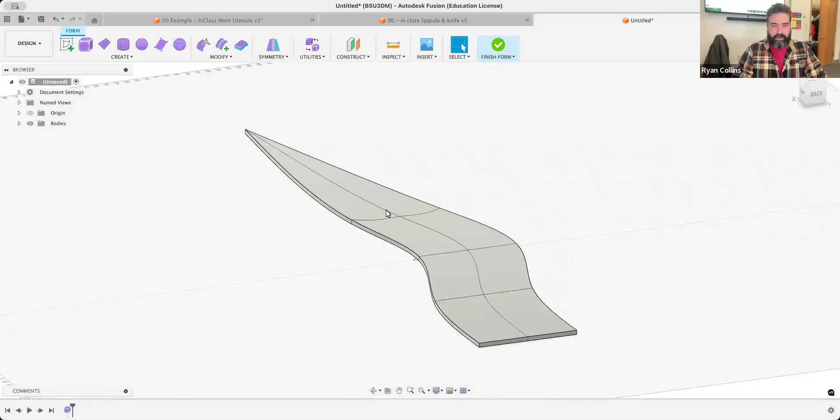So the question is, how can I add a sharper bevel to a knife blade? This is just a super curvy blade, to push the idea. I made this with just a plane that I modified and thickened, then used a crease tool on the end to sharpen the point.

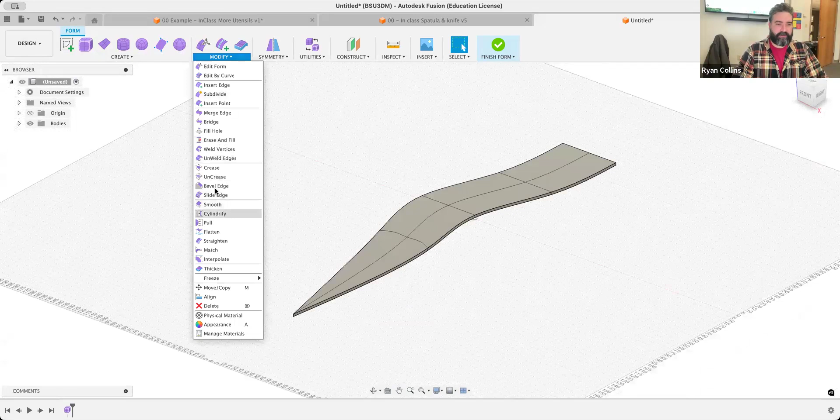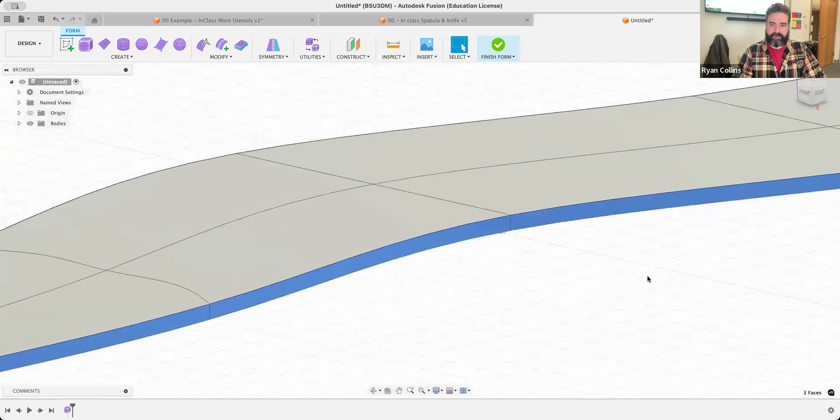So far, what we've been playing with is the idea of taking one side and welding vertices. It definitely works better if you first go through and delete the faces you're going to be working with. Let me select those if it'll let me. All of them. Nope, one more. So now it's an open frame, so you can see inside of it.

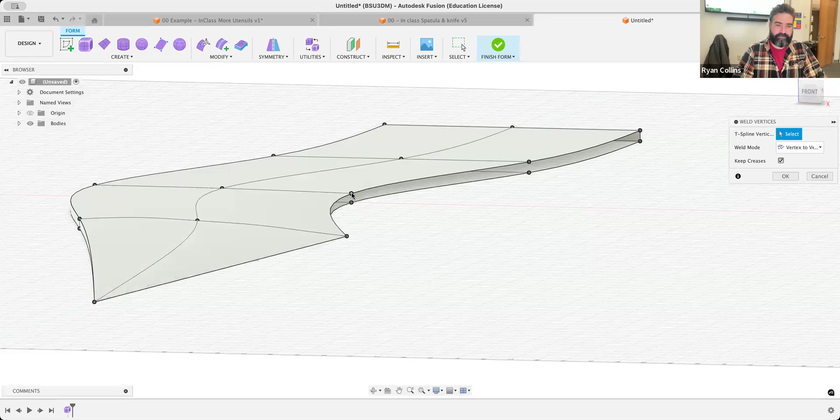So one side I'm going to do with welding vertices. We definitely ran into an oddity problem here at the end when I did this. Things will definitely change around. Now the problem here is this creates a pretty even slope from what is my center line to that edge. It still works, but that's one of the things that happens.

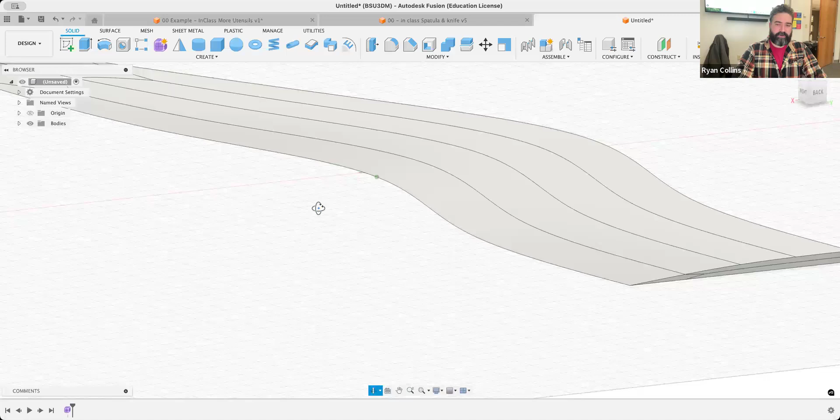I probably should have thickened this a bit more to really emphasize it. But if you are trying to really keep a crease, you could try using a bevel inside of that. So let's try to do that. Let me try using a crease right down the center line. Not sure what's going to happen here.

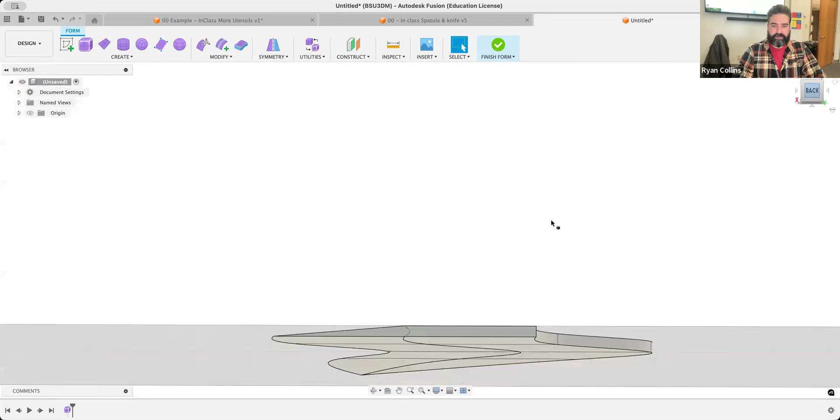So as I crease this line, I certainly get a much sharper bevel here. Now, of course, I went vertex to vertex instead of midpoint, so it did not leave them in the middle, but there you go. But if you are trying to keep the angle a little sharper, what you could try...

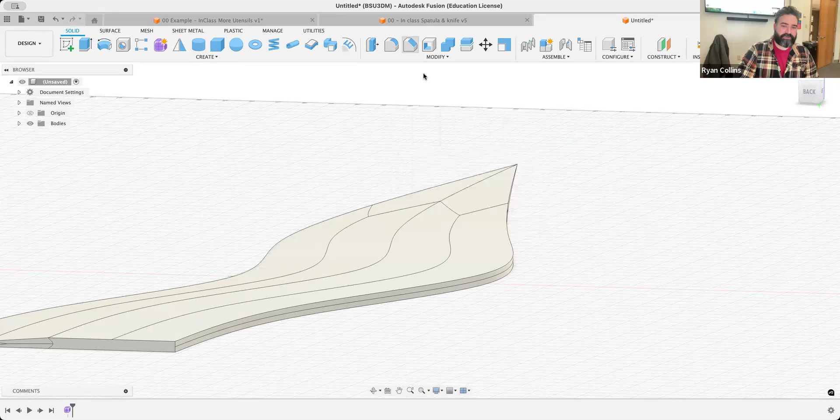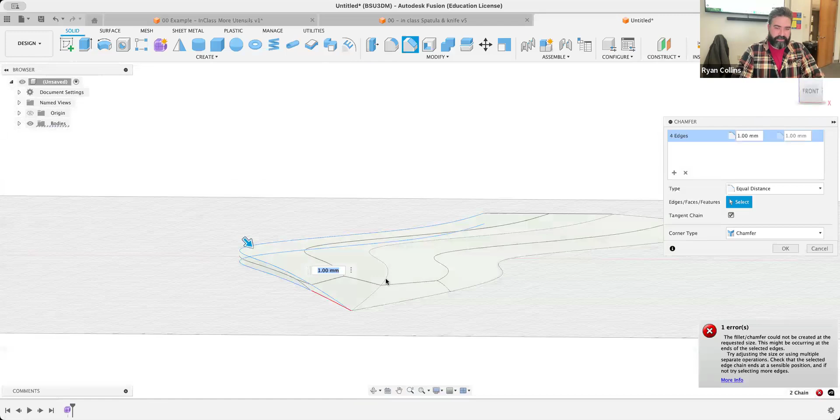...is finish form. Now that you're outside of the workspace, you could try using a chamfer on that edge and try dragging it inward. I'm going to get some complex errors, so that's not going to work either. Unfortunately, that's not going to work as well either. It does actually look like putting a crease right in the center line worked quite well.

The one other thing I've tried is using a sweep with the center line as a path. Let me show you what I mean by that. I want to create a sketch. Let's see if it'll let me on this edge. It will not, so this I will have to do again.

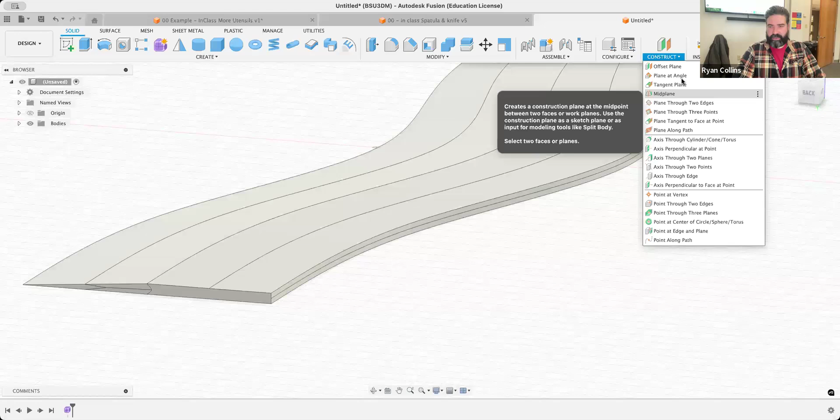Let's try plane at a point along path, and I'm going to use that edge line. If it'll let me - yes, it does let me select that center line as a path. I'm going to change my distance to 1, that'll bring it all the way to the edge. You could work from the other side as well, it doesn't matter. Hit OK, and I'm going to create a sketch on that line.

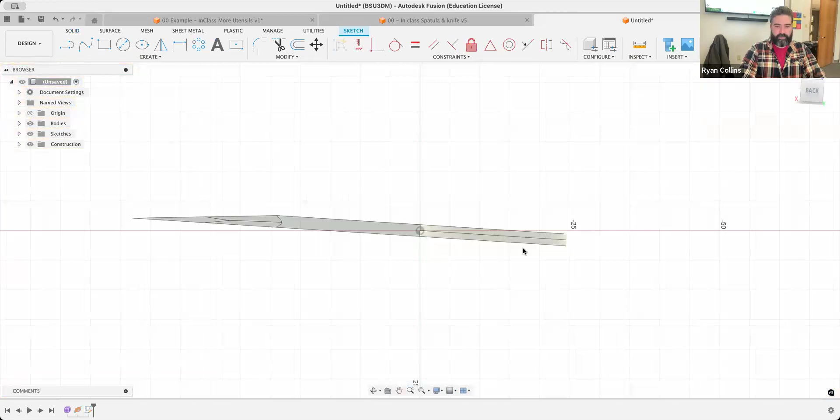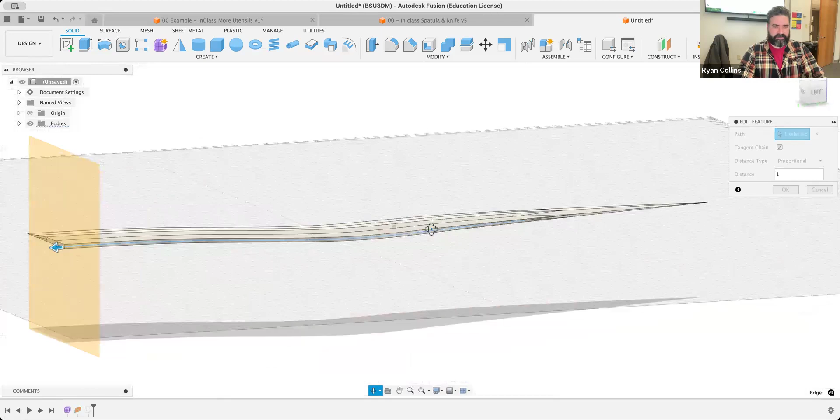Ooh, I don't know why the whole thing twisted. That's weird. Let me see if I can adjust that. I don't know why the heck that changed. For some reason the path rotated, that's super weird. Yeah, 'cause it's flat there, but then when I go into the sketch, it rotates. Never had that one happen before.

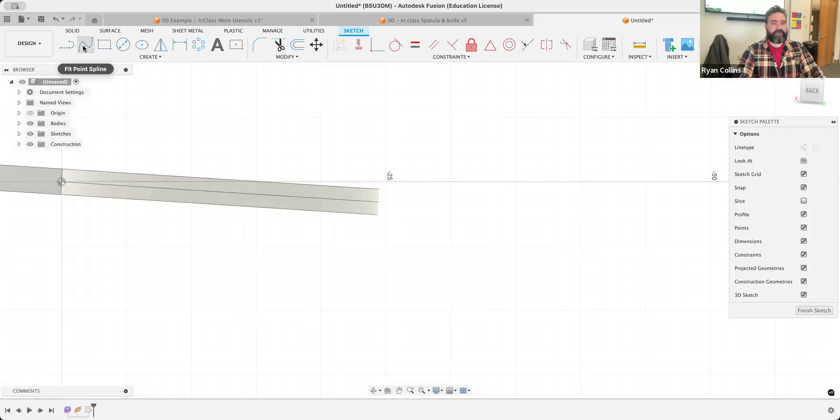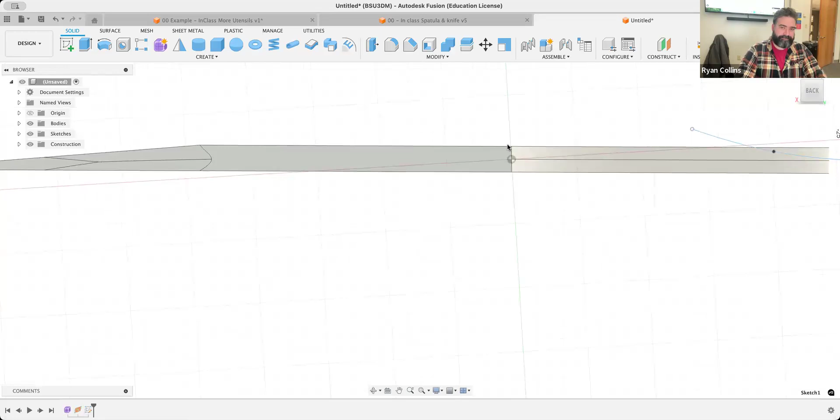Anyway, what I'm going to do is use a fit point spline from above, somewhere there, and I wouldn't go all the way to the tip, but right there. So I just have a sweeping line going through. Hit OK. And what I'm going to do here - oh, why the heck is it all the way up there? See, I didn't use my projection. Let me drag that line back over here where I wanted it to be.

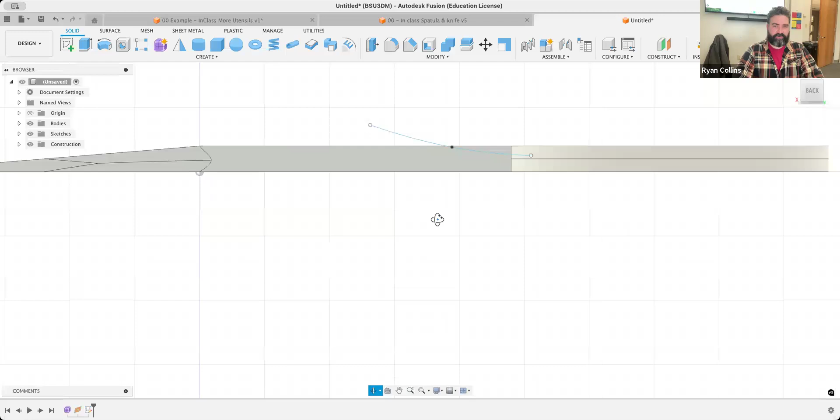Great, dimension lines, get out of the way, can't see what I'm doing. Okay, so what I've done is I created a line - that completely got lost. So what I did is I created a line just here at the end, and I'm going to use the sweep tool to sweep that profile. Oh, I needed to create that as a closed sketch, sorry.

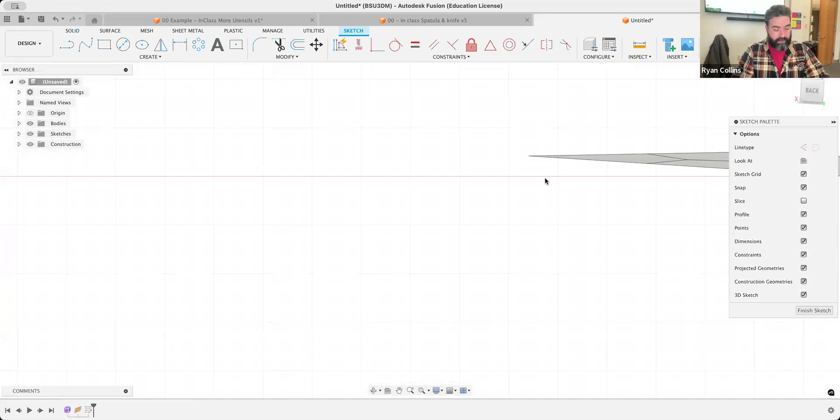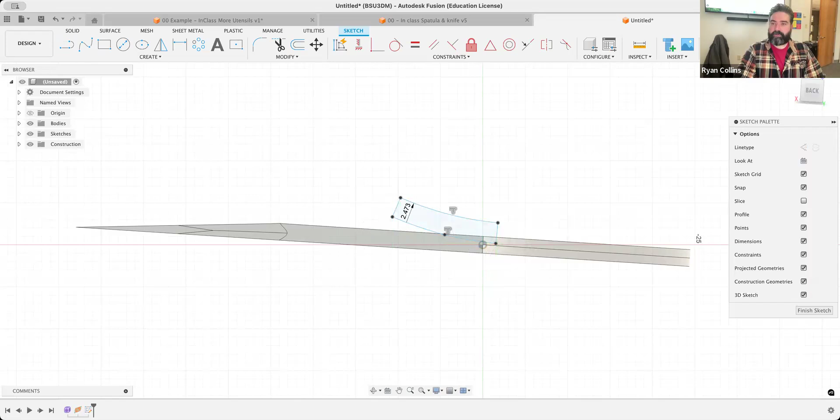I don't know why it is warping like that. So I'm just going to make a thickness that will go farther because I'm going to use this to cut. I'll go ahead and close this line up and make it a closed profile. Okay, cool, there we go. Sometimes the dimensions get really messed up on this program. All right, so I'm going to use a sweep, my profile, my path is going to be that center line.

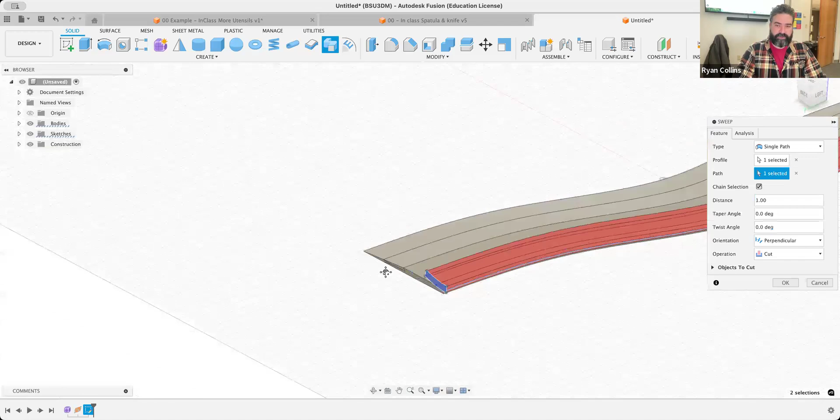And now it's going to cut all the way down, hopefully, and it's going to go right out the side. Hit OK. And now I have that cut running all the way down the profile. Now, obviously, if I had gone through my sketch and mirrored that, that would get me the same result, and that would work well too.

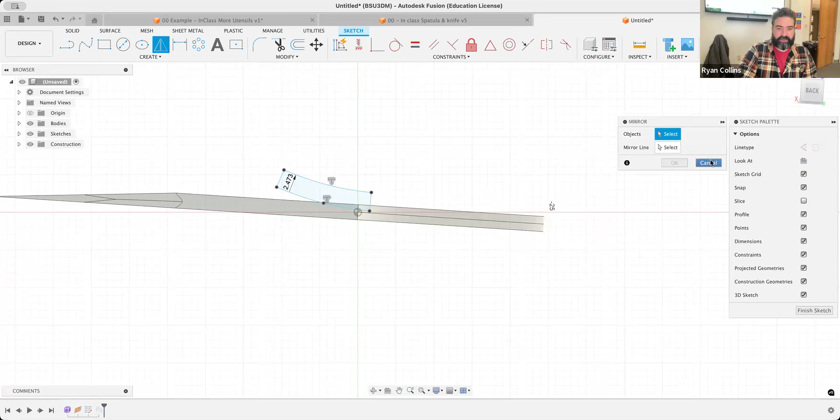So let me see if I can do that. I don't know if it'll let me because everything got so screwy here. No, there's nothing to work against. So you might be able to just mirror that option.

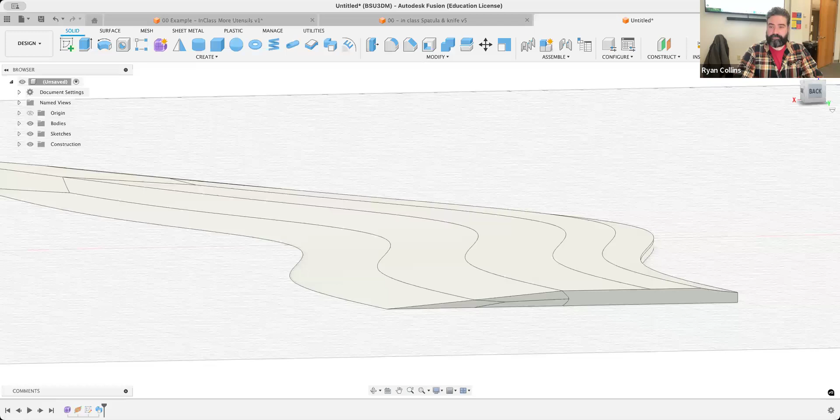So looks like the better solution, the one with fewer steps and one that's not going to get as wonky on you, is to add extra lines down the center in the form workspace and use the crease tool to throw that in. I've also used the sweep tool down the edge as a path to cut away, but this one, I don't know what I accidentally selected and it's not doing as well as I'd like, but there we are. That should at least get you close to what you want.